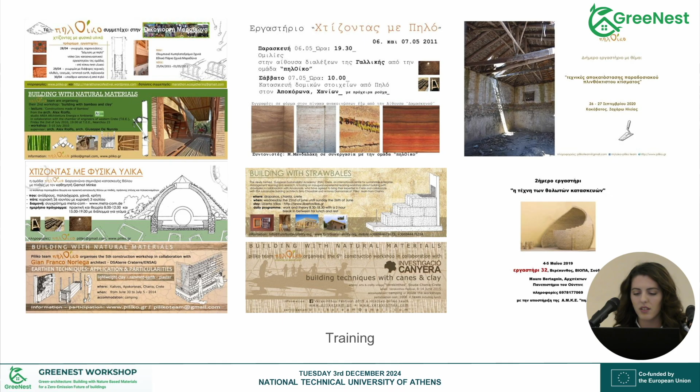Our team started the training from the very beginning with workshops, both to educate and to be educated in different techniques of building with natural materials. We always invite experts to demonstrate their local techniques. It's also a way to expand our network. These are some photos from the workshops that we did over the years, different techniques, different local materials.

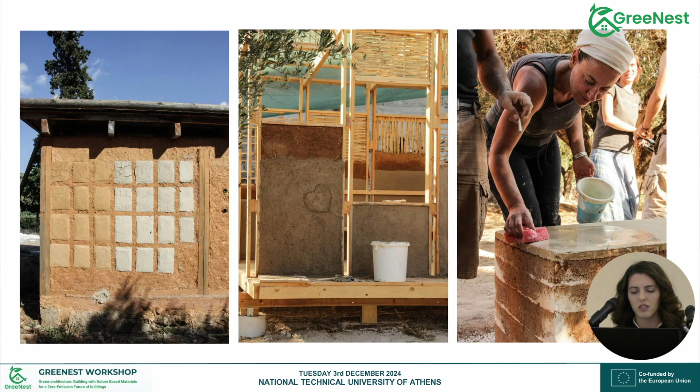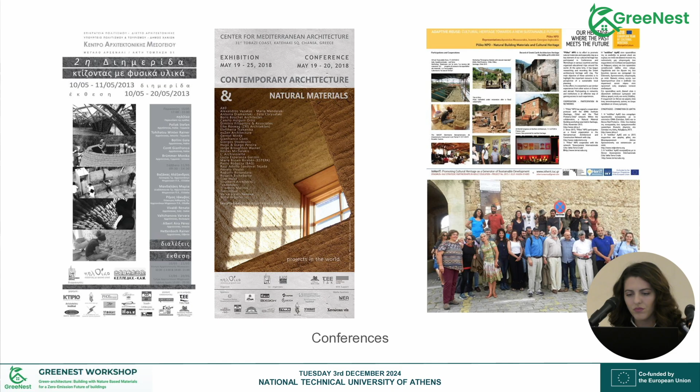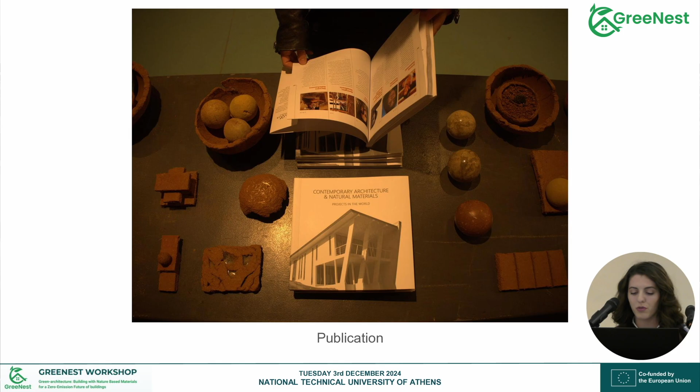Our team also travels a lot, and this is a way to enhance our knowledge and training, both in a theoretical and a practical way. We have traveled, for example, to the Balkans and Latin America. We also do many exhibitions, conferences, and lectures. Our first publication was a result of our anniversary conference for 10 years of PILIKO, with examples of earthen architecture that were in the exhibition.

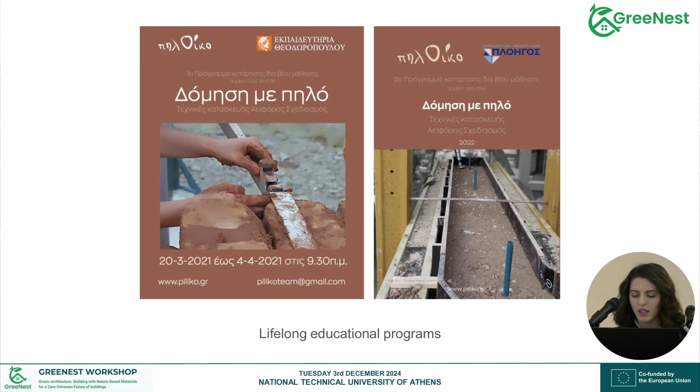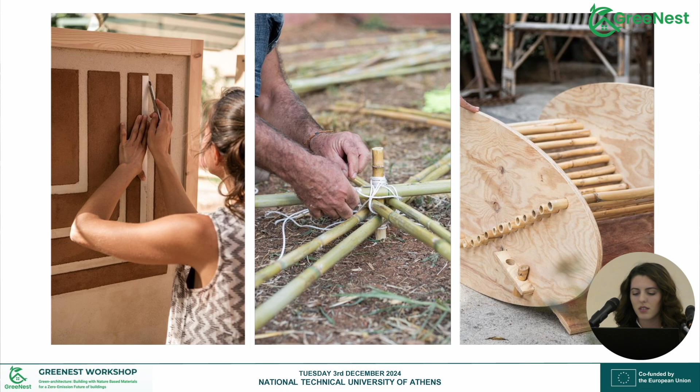Later, we organized our lifelong educational programs of more than 50 hours of theoretical and practical lessons in building with clay and construction techniques. We do all the techniques, so somebody can get familiarized with the natural materials. We also do fab labs, working with different natural and recyclable materials, such as clay, canes, wood, fabric. And we want to evolve design with natural materials and produce not only installations and more artistic structures, but also utilitarian objects.

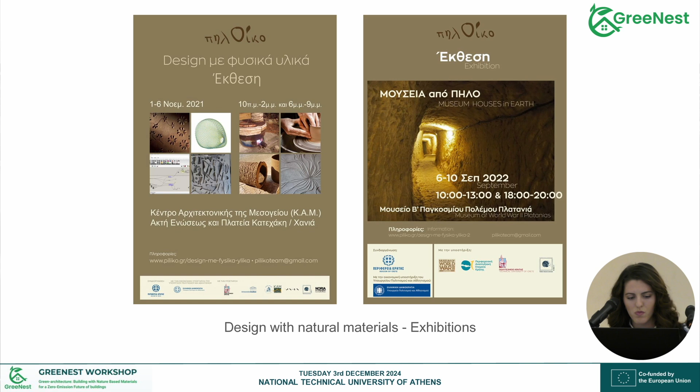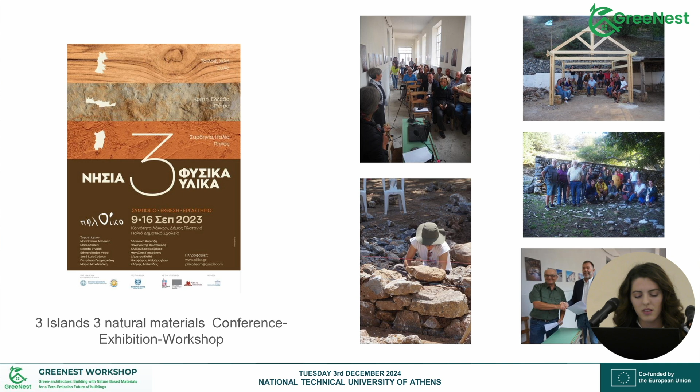We always present the outcomes of the workshops at exhibitions open to the public to share the results and disseminate the knowledge. Also, especially during the pandemic and afterwards, we organized and participated in many online events and lectures. In recent years, we try to collaborate more with local communities and do our events there to enhance and promote local architecture and local materials.

Over the years, we have participated in the writing of many scientific articles and papers, which you can find on our website, that we want to work as a tool. And we also participate in research programs. It is very important to disseminate our research to the public. This is why we also participate in fairs.

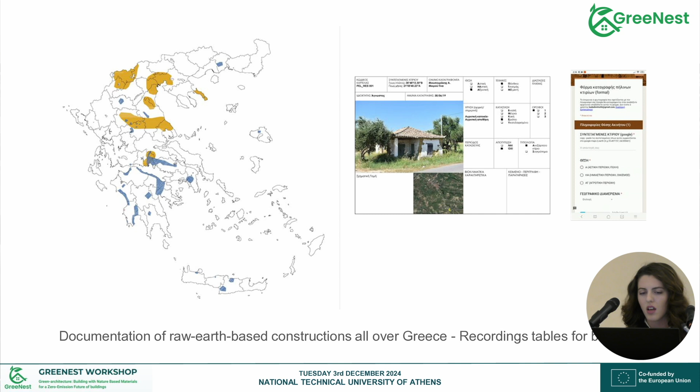Over the last 6 years, we have begun the documentation and recording of raw earth-based constructions all over Greece. Here, with the colors, are the areas in Greece where we can find raw earth-based constructions. And we want to do some events in all these cities. We began with the first event 2 months ago in September, in the municipality of Trifylia

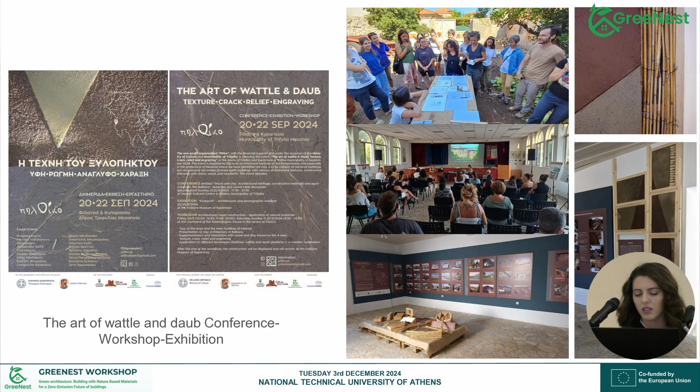in Messinia, in the Peloponnese region, an event that included a conference about wood and clay and earthen architecture in the Balkans, an exhibition about local earthen architecture of the area and examples of Balkan earth architecture, and a 3-day workshop about the art of wattle and daub, designing and constructing an installation which will remain at the local folklore museum of Kyparissia. I'll give the floor to Apostolos.

Okay, so for many years we have been involved in this galaxy of earth architecture, but we are working as freelance architects. So we must have a proposal for our customers, and we think a lot about this. We do research and we travel a lot around Greece, and we concentrate on a special technique that is wattle and daub in English, or practically a timber frame. In Greek we call it xylopikto.

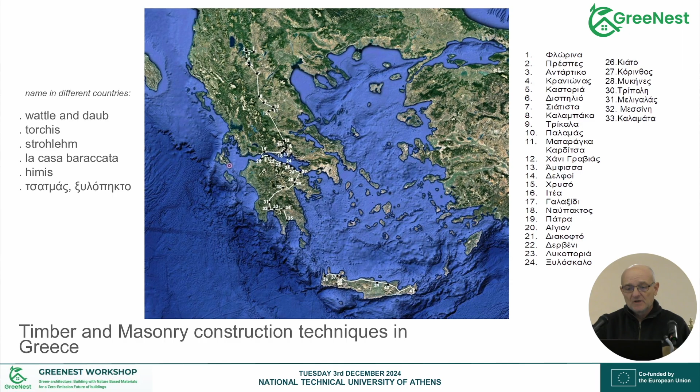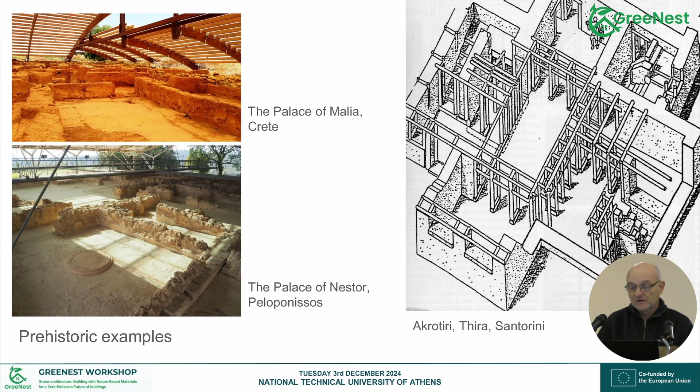And we saw that the use of timber is very important in Greece from the prehistoric epoch. Eleftheria spoke just before about the Minoan civilization, but we know that, for example, the palace of Nestor in Peloponnesus, or the Cycladic civilization in Akrotiri, had a huge use of wood. And we discovered all around Greece that a big part of our heritage is with wood.

So we have here two examples. One is the anti-seismic technique of Lefkada. Maybe most of you know about it. But another example is other wooden and earth constructions that we found traveling in the west part of Peloponnesos, especially close to the city of Filiatra and southern. And we are studying this case now.

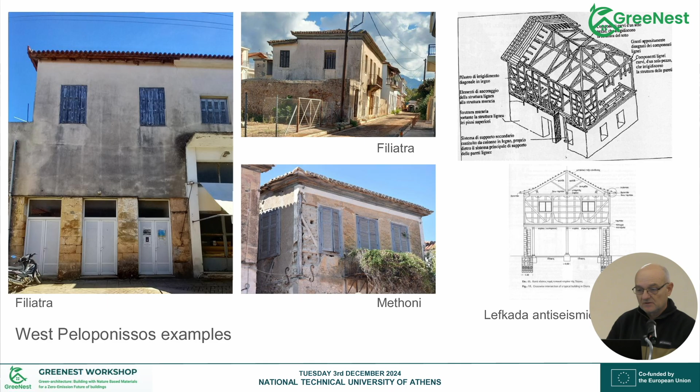But we see that not only in Greece but everywhere, as you know very well, this technique is from the medieval epoch, and we have a lot of documents. For example, we can find in the center of historic cities like here in Toulouse multi-storey palaces with wooden and earth construction. But we have another movement in recent years with the light clay system, with which we try to give our proposals for new buildings, which Zeta can now describe to you.

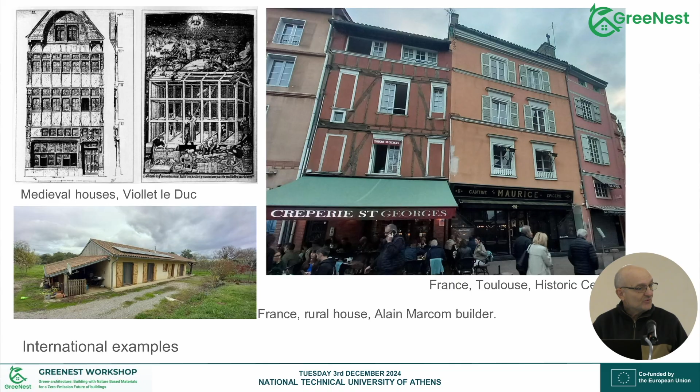So we had the luck, I would say, in the last years to have some people who decided to build with these techniques. I have first of all to say that in our Greek society, people are not convinced that they can use earth and other natural materials to create buildings. They are afraid. There are the conventional techniques with reinforced concrete and bricks that they are used to, so most of them prefer to follow this way of construction.

And of course, we have seen all these years that it was quite impossible to convince any of them to change their way. So our four experiences were with people who had already convinced themselves that this way of building is right for them, but also for the environment. That's why I say we were very lucky, because all the work we have done with Piloiko in the dissemination of earthen architecture and earthen techniques would be only romantic if we did not have these four buildings, going through the procedure of issuing building permits and constructing real buildings with these materials, and also for our future perspective that we would like this way of construction to be a future way for the Greek country.

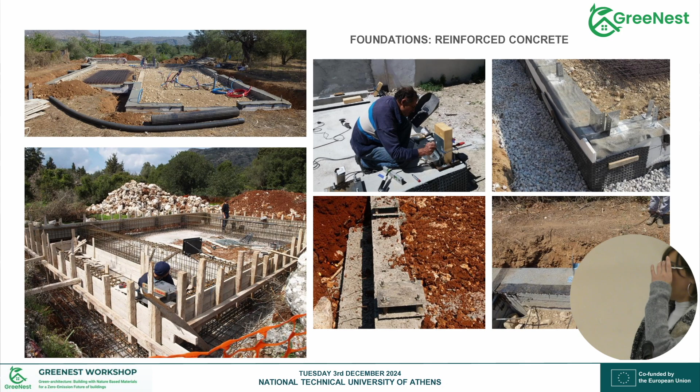So mostly on top of these foundations we have a sealing membrane, so that both the timber frame structure and the wall made from earth and natural materials are not hazarded by moisture from the ground.

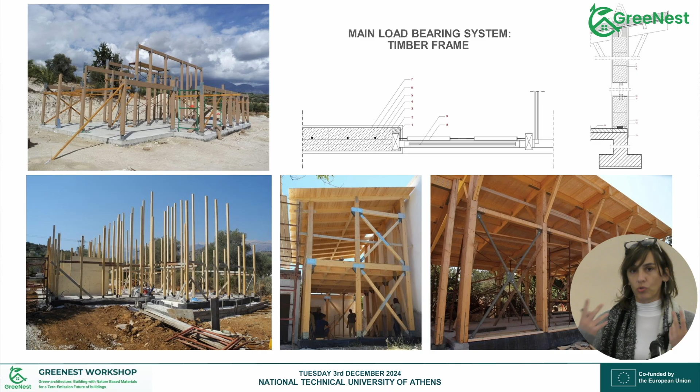We have to say that usually the wood we use is glued laminated timber frame, because first, if we need certificated wood from recycled wood, we can only have it in glulam, at least in our country. Secondly, only in glulam wood can we find specifications about the load these constructions can bear. Natural wood in Greece is not easily available with specifications that can be used by the civil engineer to solve and do the study for the structure.

Here you can see different ways and philosophies of the statical study. Every civil engineer has his own way of thinking about how this structure has to behave. So we have the experience of Eleftheria, for example, as you see in the four pictures on the left, where we have a model. In this model, Eleftheria has come to the final decision that all this wood can be of small dimensions. We can have metal junctions that are not different for every junction, but one applied in all these corners, easily like a Lego, which makes the whole construction easier and quicker to finish.

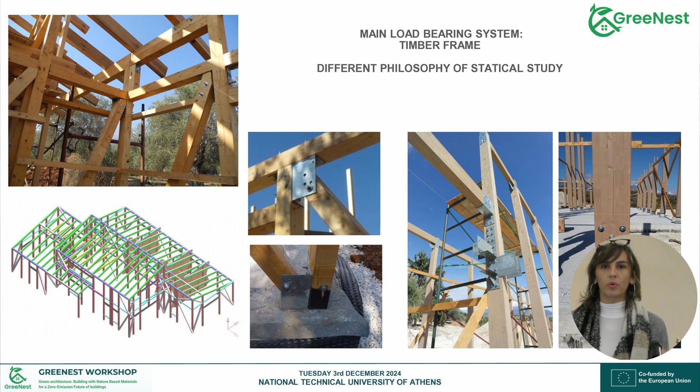Other experiences that we have from other civil engineers are more, so to say, conservative, I would say. Probably because civil engineers do not know so much how wood behaves in earthquakes, or don't know it very well because most of them are used to designing constructions of reinforced concrete. So they give oversized dimensions for the wood in order to be sure this is going to behave well.

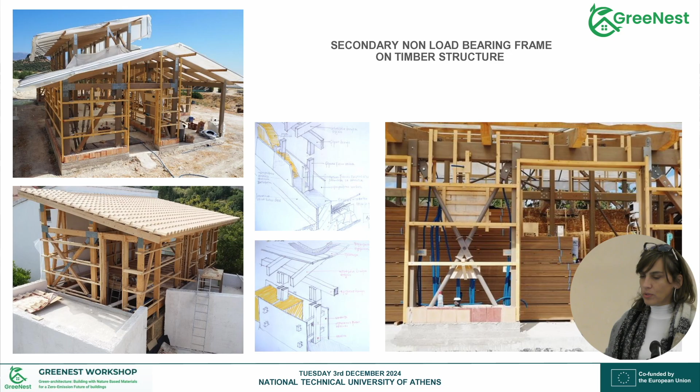This main construction for our techniques uses a secondary non-load-bearing frame, which is mostly constructed from natural wood in smaller dimensions. This has two roles. This secondary frame is studied at an early stage of the project because it has to do with the mold we are going to use later for construction of the walls, and also because on this secondary frame we can put all the electrical wiring in the right position before construction of the walls. This helps us gain a lot of time and money because we have a very clean site, and then we can put these plastic rollers inside our wall during construction.

The non-load-bearing construction techniques that we use are with nature-based materials and rural waste. By nature-based materials we somehow define earth, and also lime, because all the techniques we describe have to build a system that has the possibility to respire, to breathe. So during these constructions we do not use cement-based or other industrial-based plastering or other materials in our walls.

External non-load-bearing masonry we have used with straw bales, whole straw bales taken directly from the land. These techniques are not very easy, particularly for us, because we cannot build load-bearing walls from straw, which means we have to have columns. If these columns are inside our walls, we have to cut the straw, and this was our case. So we had to cut the straw, rebind it, find the right way to put it inside our walls, and use wooden beams to press them in order to make them stable between the columns.

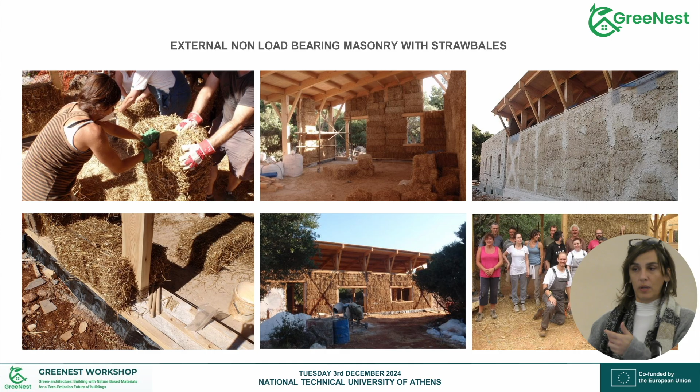During this construction we also had a workshop, which is important for us and for the people around, to be able to see the constructions, to participate, and also to pass on the knowledge to other engineers and architects who want to use it.

The light clay technique is the technique that we use mostly in our constructions, and we have realized it is more satisfactory, more satisfying, and convenient and right for our climate.

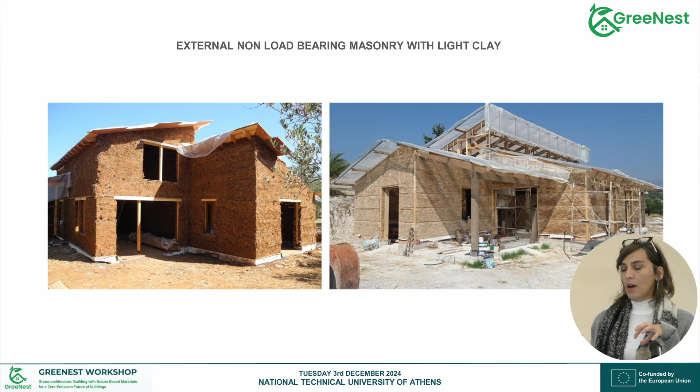The technique is an old one, and here you can see some pictures from the light earth building book by Franz Volhard. This technique dates back to 1944 and 45: light straw clay, fiber clay.

Light clay means that I have earth, and inside I put material that creates a mixture with a certain dry density. Light clay means a bulk density of less than 1,200 kilograms per cubic meter.

We can have a light clay and a medium pumice category, which is even lighter, between 600 and 800 kilograms per cubic meter, and a very light mix of 300 kilograms per cubic meter. This means I have a smaller portion of clay and more straw.

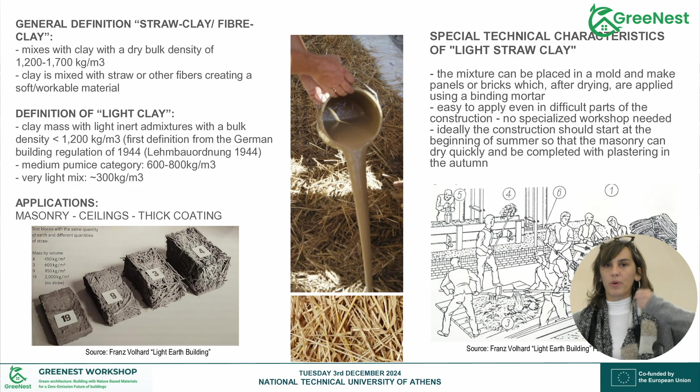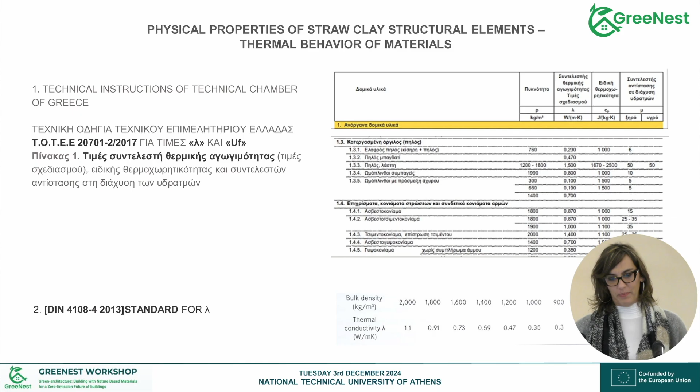In Greece we don't have particular regulations, but inside the technical instructions of the technical chamber in Greece, adobe bricks are mentioned, both thick adobe bricks and adobe bricks mixed with straw. They give us some numbers about the lambda value, the thermal conductivity, which is important for calculating the thermal behavior of the building.

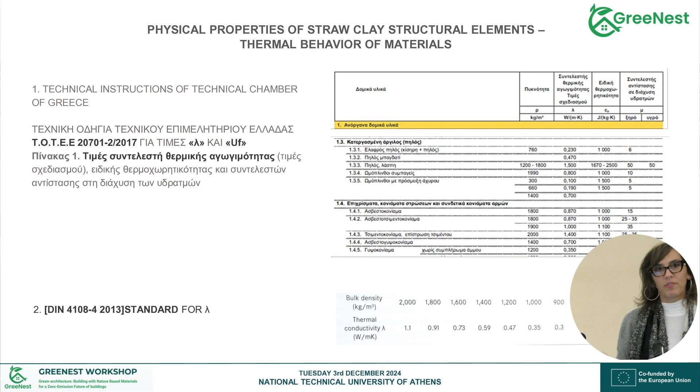Below you can see the DIN standard for the same materials. So we are very close, and even without regulation, we can use these technical instructions to build and to obtain permit issues for buildings.

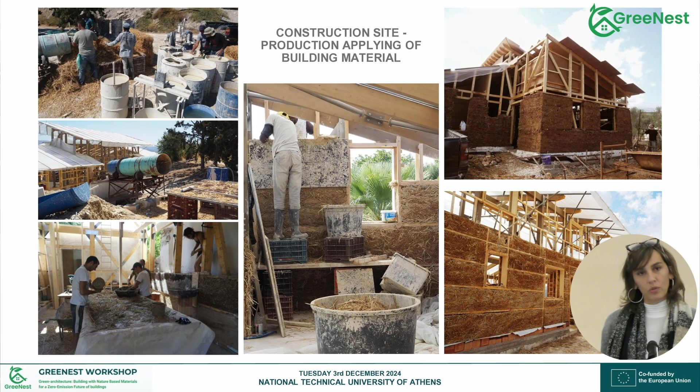In the center you can see how these molds are set up, and the workers putting the material inside. On the right side you can see the facade. During this procedure you don't need to wait long before moving the mold from the lower to the upper stages—once it firms up in the first row, you take it off and move it up, which helps the work go quickly.

The production of adobe bricks with earth is a technique that we also use inside our constructions, mostly for internal walls. This helps us a lot maintain the temperature inside during winter and high temperatures, so we raise a little bit also the thermal behavior of the building.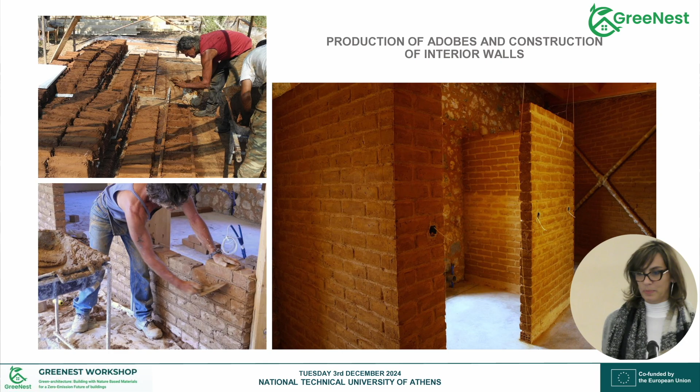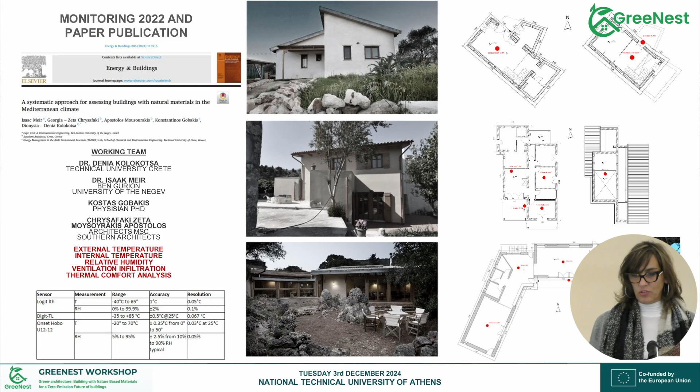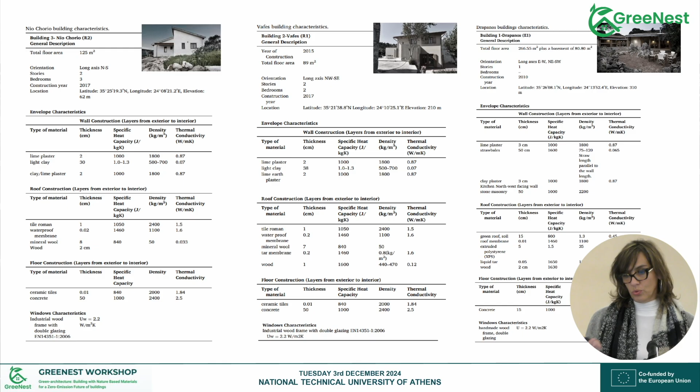So we had the opportunity in 2022 to do monitoring in 3 of the 4 buildings that we have built, with Professor Denia Kolokotsa from the Technical University of Crete, Professor Isaac Meir from the Ben Gurion University of the Negev, and a physicist who was doing his PhD at the university. We measured external temperature, internal temperature, relative humidity, ventilation infiltration, and thermal comfort analysis for the 3 buildings. Here you can see all the characteristics of the buildings that we had to study and compare.

And here are our results. On the left side you can see the outdoor temperatures in a cold day, a mid-season day, and a hot day for the three places. They are mostly at the same level of temperature.

In the second column you can see the indoor temperature. For the first house, in Drapanos, we have an external temperature in winter shown with the yellow line, and inside we have the most stable inflection of the graphic.

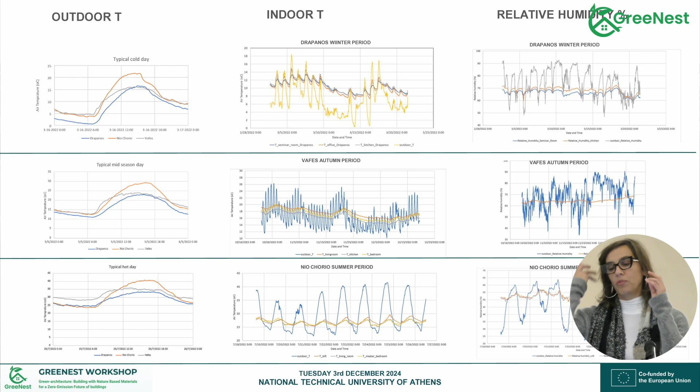Yes, here in Vafes, that was in the autumn period. Again you see the external temperature outside and the internal temperature inside our buildings.

As well here in Nio Chorio, summer period, with external temperatures mostly over 40 degrees, and inside we didn't reach not even 28 degrees. And I have to say that these buildings do not have air conditioning.

They have only one stove, a fireplace. And they achieve these results only from the construction, by using these techniques.

The relative humidity, which is a very important factor in how somebody feels inside the building, shows the same thing. In Drapanos, in winter period, we have very high movement of the external humidity, but inside we have a stable environment.

The same in Vafes, you can see that here. The same in Nio Chorio - this is the external and this is the internal.

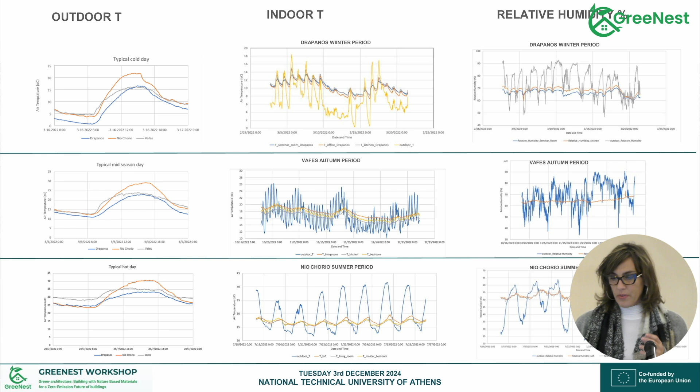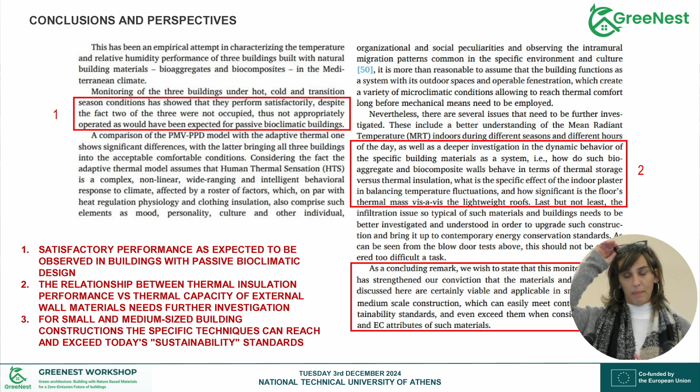These results were published in a scientific journal, in Elsevier. This is a very important step for us, because we have tried and reached to show that we have very satisfactory results for these buildings in Crete, in Mediterranean climates. This is important because they can reach the sustainability standards and even pass them probably in the future.

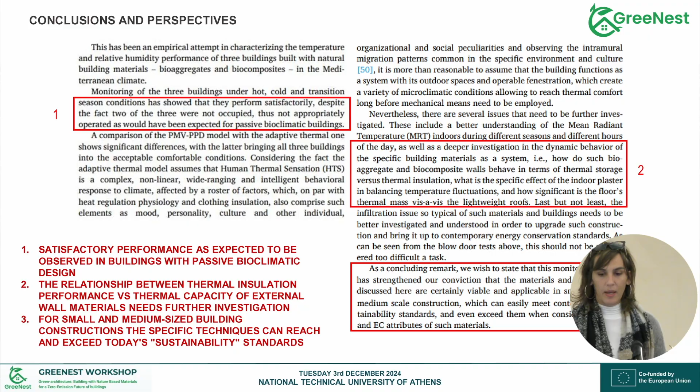So practically we used for these buildings wood, straw, earth, and a little lime for the outside last level of plaster. So I think we have a good experience now, and we can tell about the environmental benefits.

Like low energy consumption during the construction and during all the life of the building. Eco-friendly materials and techniques for the builders and the users. So it's a very safe and friendly technique, and this is the reason that soon the owner got involved in the construction.

Easy recyclability of the building materials, and everybody can understand that at the end of the life we can recycle all the materials. And contemporary, we have a flexible architectural design. We can make architecture - this is very important for architects.

About the socioeconomic benefits, it's a completely different concept to the economic working of this construction. It favors the circular and the local economy. We can involve a lot of persons from the place and work there.

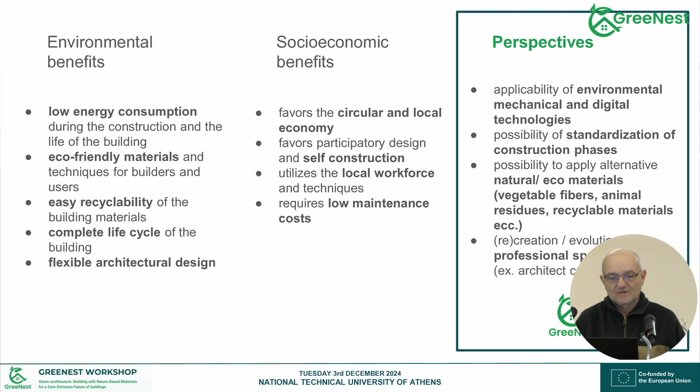Okay. Sorry for our difficulties with the English language, but...